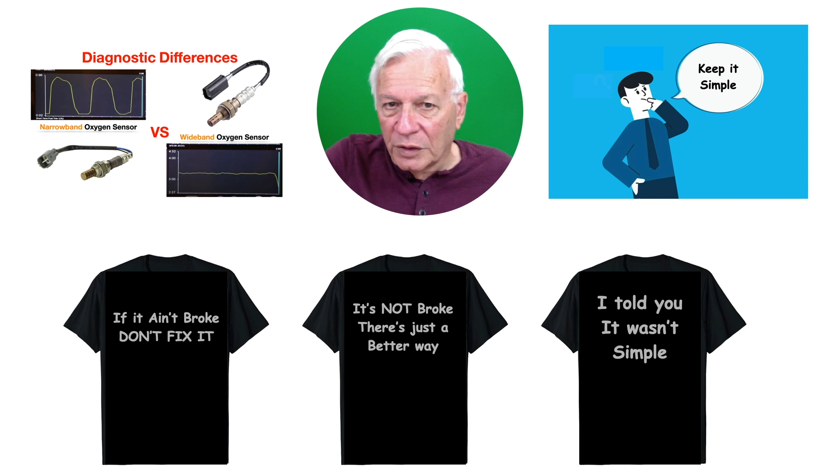In my recent video, I tried to simplify the diagnostic differences between a narrowband and a wideband oxygen sensor and why we have them. But as many of you know, it is not that simple, and many of you have asked questions and commented. Also, some manufacturers monitor and report the data differently. For example, some report amps instead of volts, and other differences, but they all focus on different things. It is not simple at all.

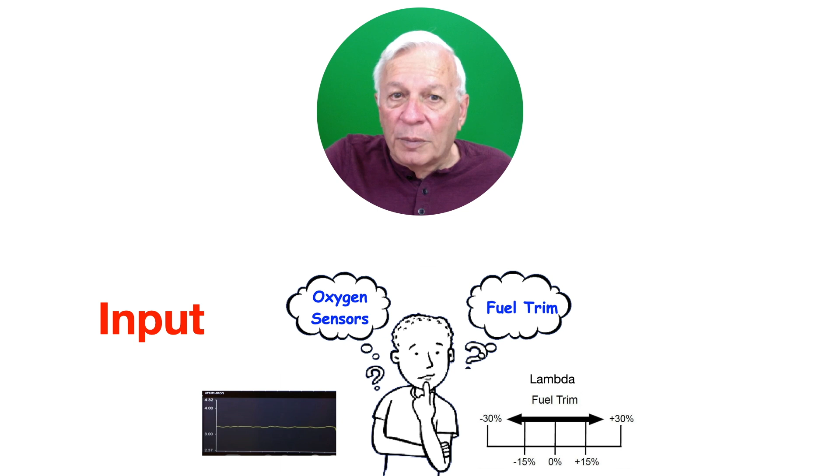To understand just how confusing it is and how technical they are, watch this YouTube video. Frank explains it very well, and it is very technical. Now, we know that oxygen sensors are the input and the fuel trim is the output. We need to understand both.

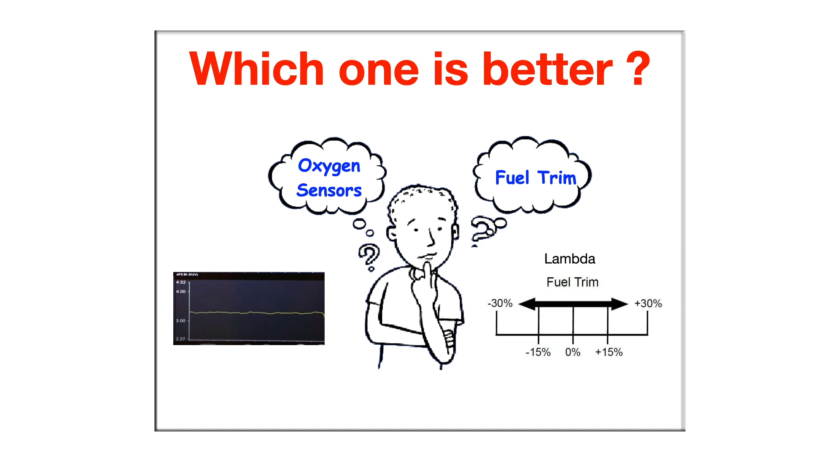That brings me to this question. Which one is better, oxygen sensors or fuel trim? So what do I mean by better? Well, I could have said which one is more important, but they are both important. The better question is this: which should you focus on? My recommendation is fuel trim. Why, you ask? Well, that's a good question, and it deserves an answer.

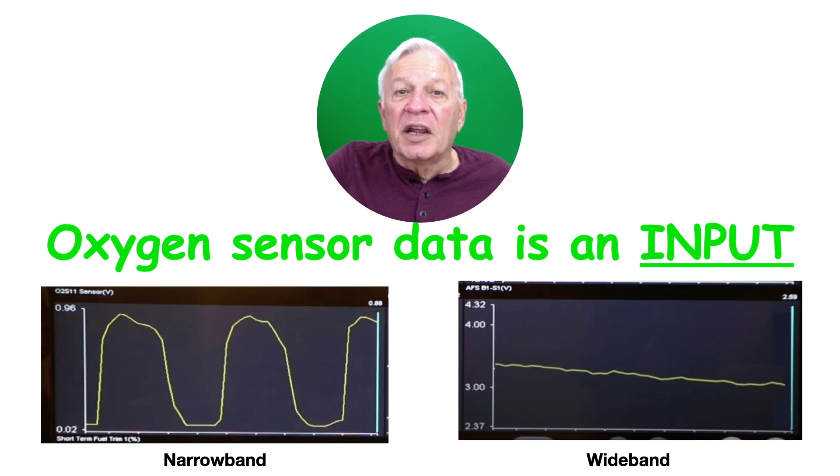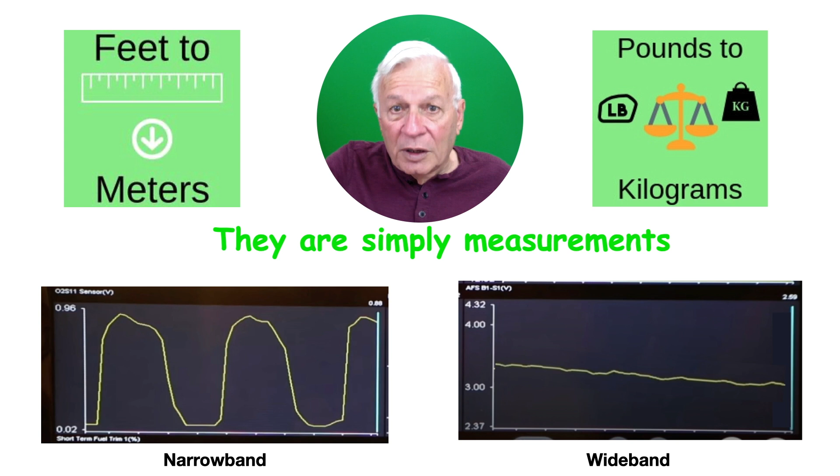Oxygen sensor data is an input. It really doesn't matter if it is a narrowband or wideband sensor, because they are all simply measurements, like feet or meters, pounds or kilograms. They are different, yes, but they are simply measurements. The important thing is what the ECM does with those measurements.

The computer can't add or take away air. It can only add or take away fuel. So, which is it doing? Well, oxygen sensors won't tell you that, but fuel trim will. That means I need to ask this question again.

Which one is better, short term or long term? Well, I'm glad you asked. My recommendation is long term first and then short term. Well, why, you ask? It's a good question.

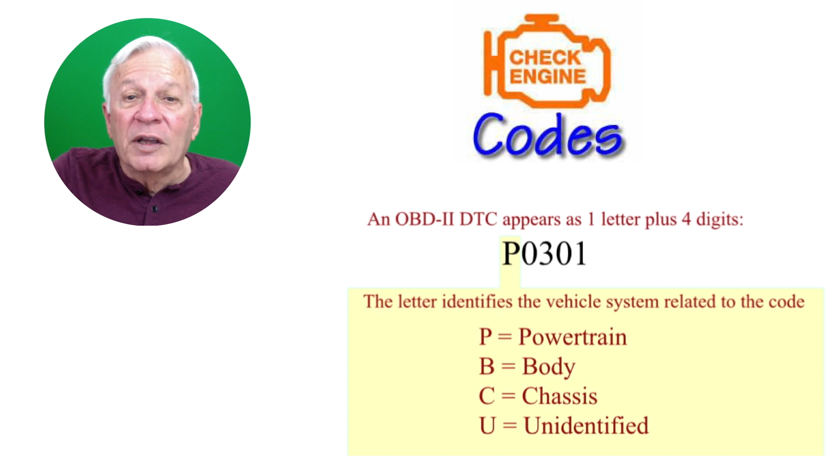I've been around for a while. In fact, I've been here before codes. And if you're like me, you can remember having a clear and distinct misfire, but there were no codes stored in the memory. They called that the good old days, right? Did you know that short term does not set codes?

Short term is constantly adjusting injector on time to balance the air-fuel mixture. It's supposed to do that. These changes are made a few times every second, but they are not stored in the ECM's memory. So freeze frame is not going to be any help.

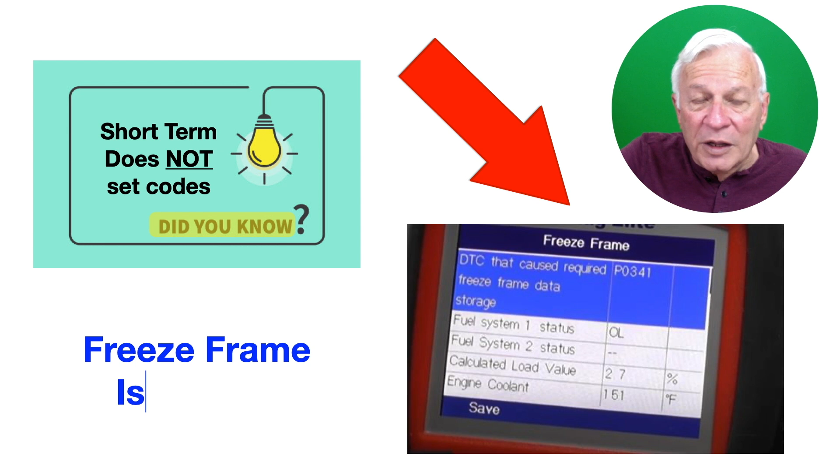Normal is not a problem. Normal does not set trouble codes. Remember, driving conditions are always changing, and the computer has to compensate for all of these changes. Normal is good. That's what is supposed to happen. No codes will be set because it's normal. Not normal is bad. Something's wrong. Codes will indicate a problem.

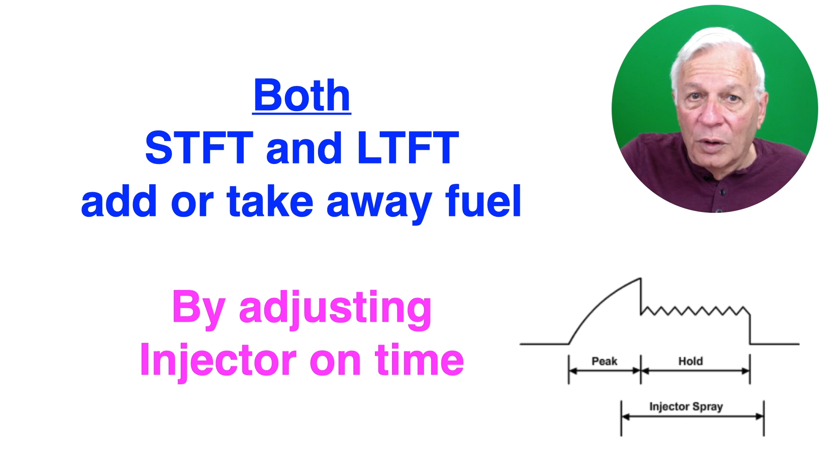Both short-term and long-term add or take away fuel by adjusting the injector on time. But long-term does not change the injector on time directly. It changes the trim strategy. Trim strategy - what in the world is that? Well, it is a plan of action designed to achieve a goal, and that goal is to balance the air-fuel mixture, and balance is stoichiometric 14.7 to 1.

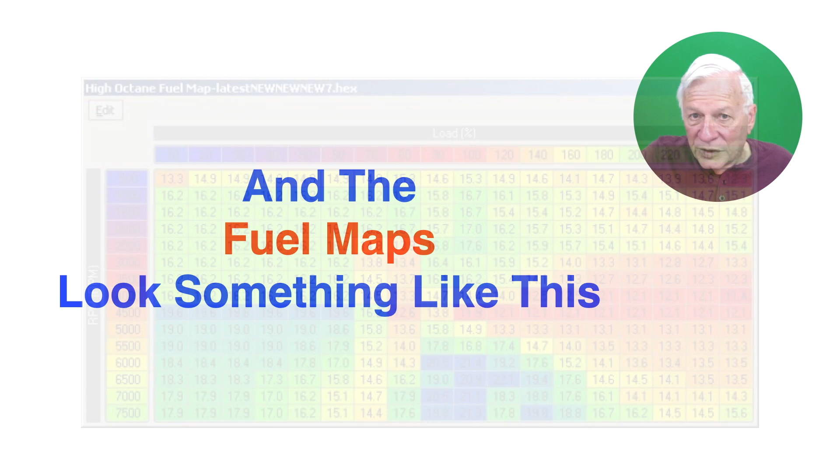This is achieved through what we call fuel mapping. The engineers have considered all of the possibilities and created fuel maps, sometimes referred to as tables. Now, fortunately for us, they have done all the math ahead of time. And the fuel maps look something like this. Notice how 14.7 to 1 appears right in the very middle and at various other points on the map.

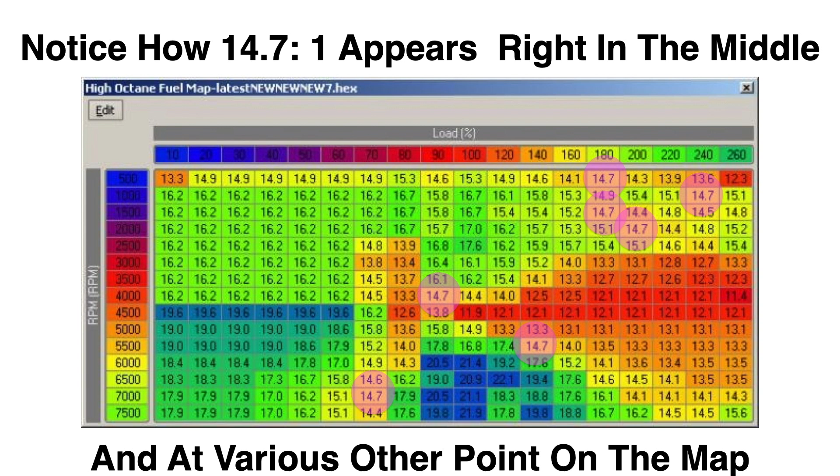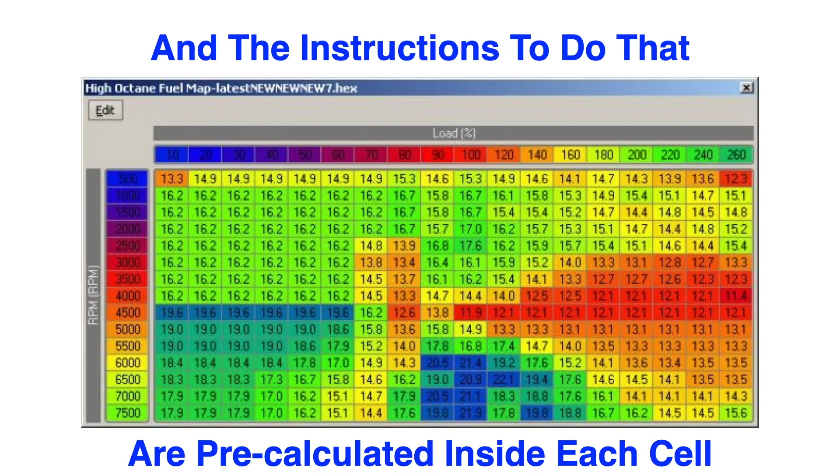Remember, long-term fuel trim does not directly change the fuel injector pulse width. Short-term does. Long-term changes the strategy to achieve stoichiometric 14.7 to 1. And the instructions to do that are pre-calculated inside each cell. Notice how many cells there are based on load and RPM changes.

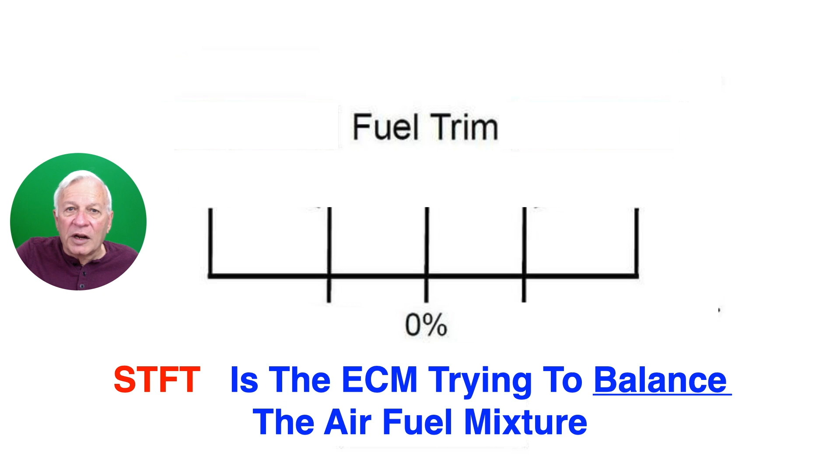Now remember, short-term fuel trim recalculates with every breath of the engine, and it can do that all day long. In fact, it's supposed to. But it is limited to how much of an adjustment it can make, and that limit is 10%. Short-term fuel trim is the ECM trying to balance air-fuel mixture. We call it perfect balance, stoichiometric 14.7 to 1.

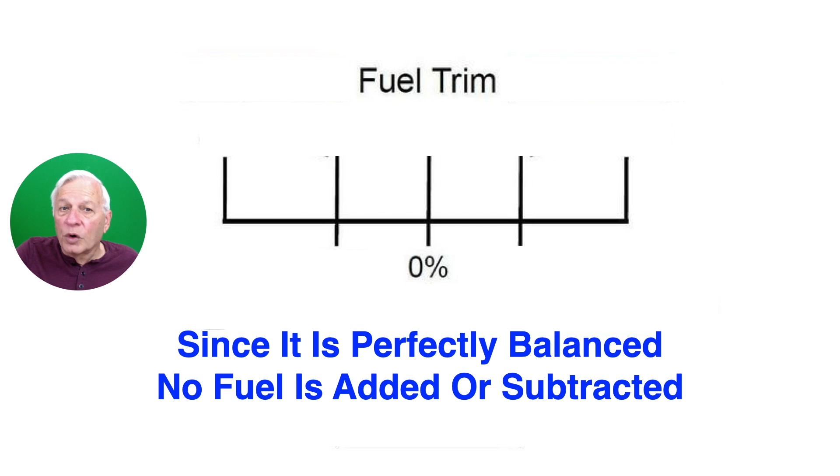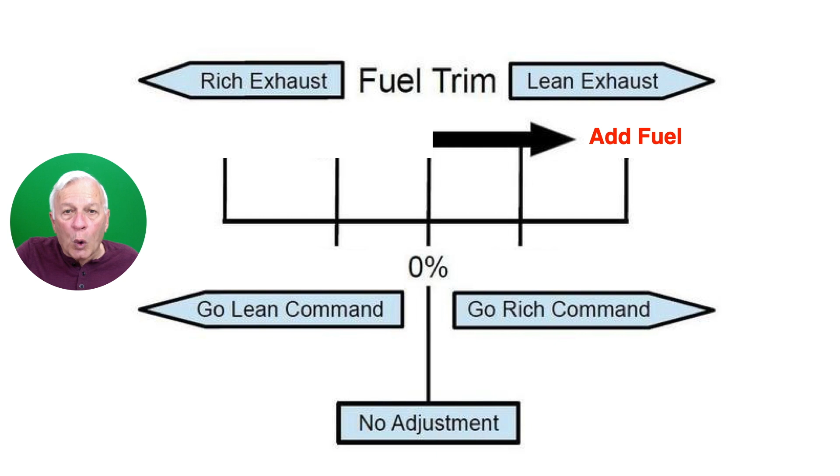Since it is perfectly balanced, no fuel is added or subtracted, and the percentage is 0. No adjustment is needed. Now, if we have a lean exhaust, the ECM issues a go rich command, and it adds fuel. If we have a rich exhaust, the ECM issues a go lean command, and it starts subtracting fuel.

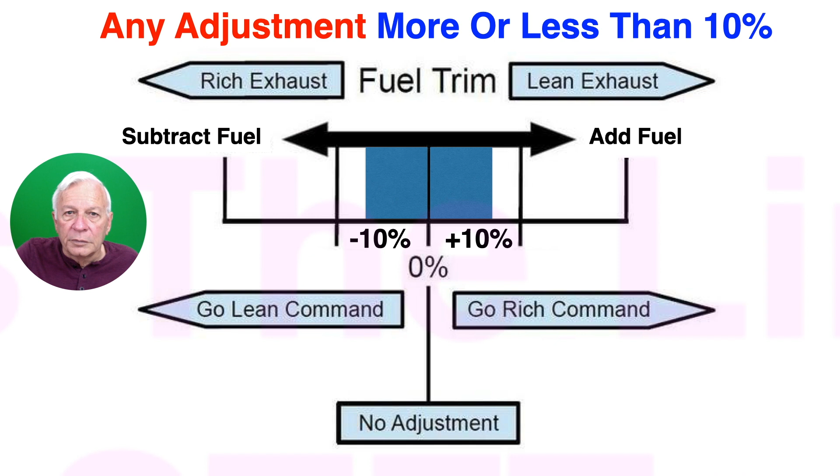Remember, I said it can do that all day long. In fact, it's supposed to, well within limits. And those limits are 10%. So we have a negative or positive 10% limit in this graph. Now, here we have colored in the 10% limit.

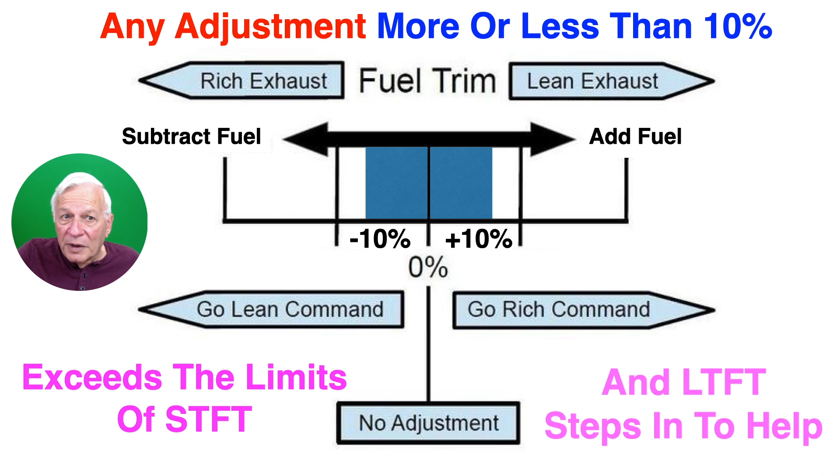And any adjustment more or less than 10% exceeds the limits of the short-term fuel trim, and the long-term was going to step in to help. At this point, the long-term fuel trim changes the strategy, and this strategy changes as needed to gain control and balance the air-fuel mixture. And the short-term fuel trim resets at 0, and it will continue to make adjustments until it reaches its limit of 10% again.

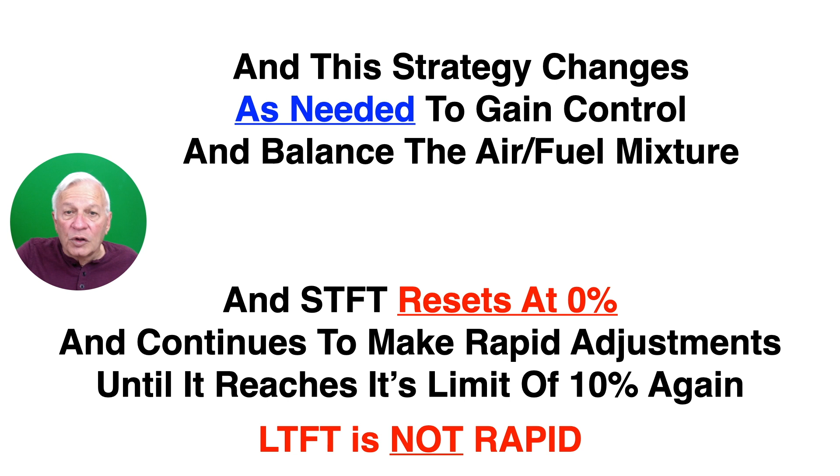Now it's important to note here that long-term fuel trim is not rapid. It usually takes a few seconds to be updated. Remember, it is changing the strategy based on the short-term reaching its limit or its ability to control the balance. Now this all continues until the combined adjustment of both short-term and long-term are above 10%. At this point, the air-fuel mixture is no longer balanced.

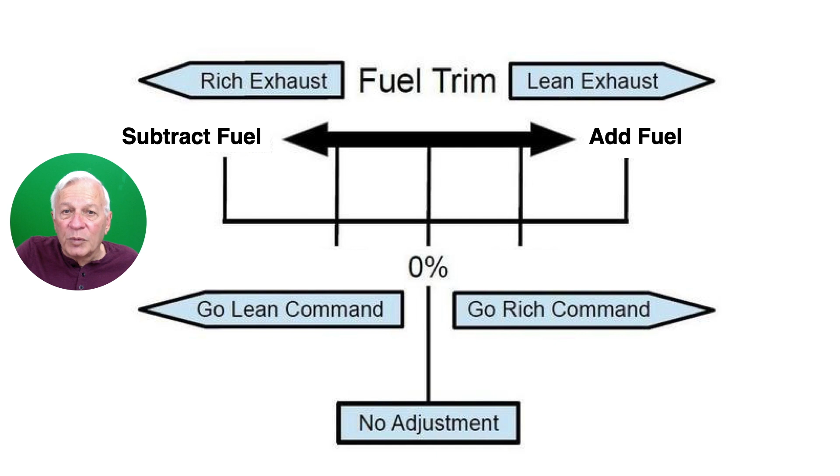Let's watch how this works when we slow it down. So as the engine runs and develops a lean condition, the ECM will add 4% to try and enrich the fuel.

Now it's going to recalculate. Since we just added fuel, it's going to be rich, so the ECM is going to subtract fuel. The ECM is going to recalculate. Since we just subtracted fuel, it is going to have to add fuel again in order to achieve balance.

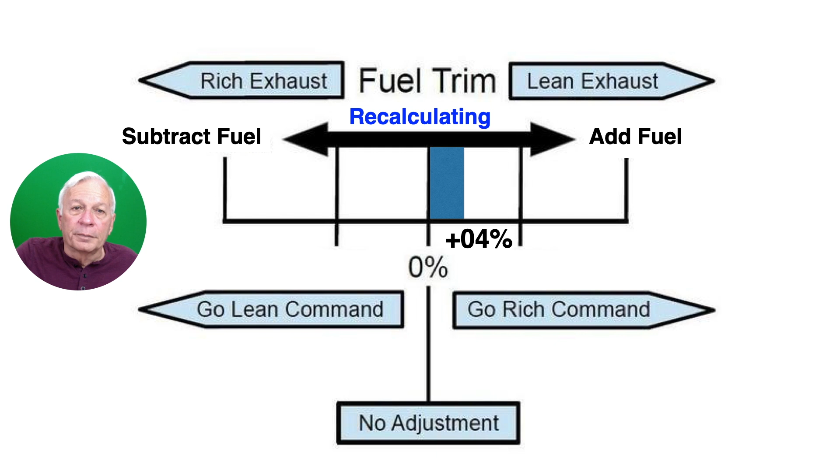Now it recalculates, and it might subtract 7%. Now it recalculates, and we may have to add 8%. Then it recalculates again, and we may need to subtract 9%. Then it recalculates again, and it may add 10%. It will recalculate, and then it may subtract 13%.

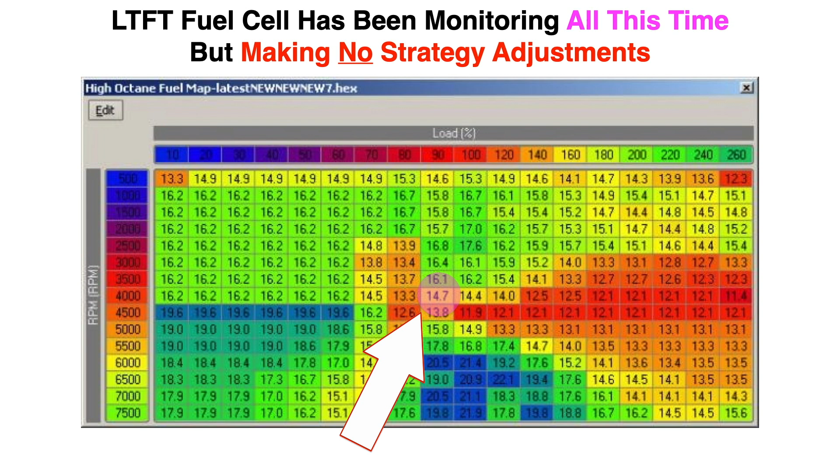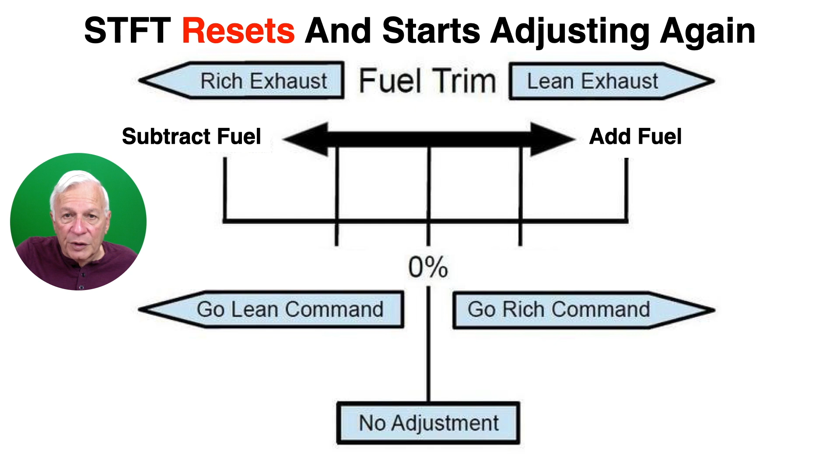Now we've gone over the 10% limit. Now the long-term fuel trim has been monitoring all this all the time, but it's not making any strategy changes because it has achieved the 14.7 to 1 stoichiometric balance. Now the short-term resets and starts adjusting again, so we're back to 0%. It's going to continue to recalculate, and unless the problem is gone, it's going to try and add fuel.

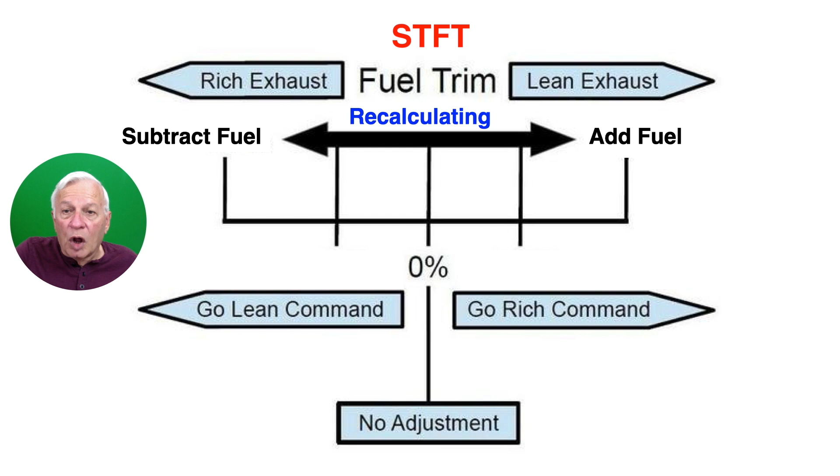Now in these recalculations, I am just making some assumptions here. These percentages would always change due to how severe a problem you really had. Now it would set a code and change the strategy. Since it could not maintain balance, it would shift to a different strategy and attempt to achieve the balance of 14.7 to 1 again.

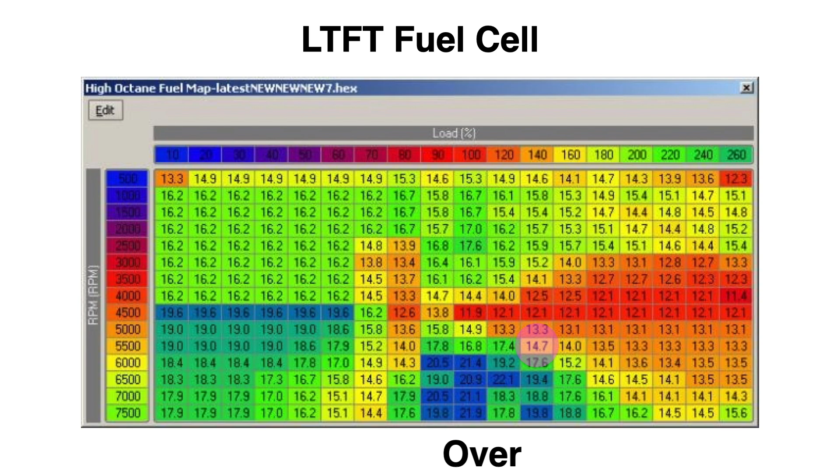It's recalculating over and over again as long as the engine is running. The ECMs do a very good job of managing the air-fuel mixture, and all this recalculating and fuel trim strategy changes go on without even us being aware of it. Usually. But sometimes the PCM can't keep it balanced, and that's when the check engine light comes on, making us aware of the fact that it can't keep it balanced.

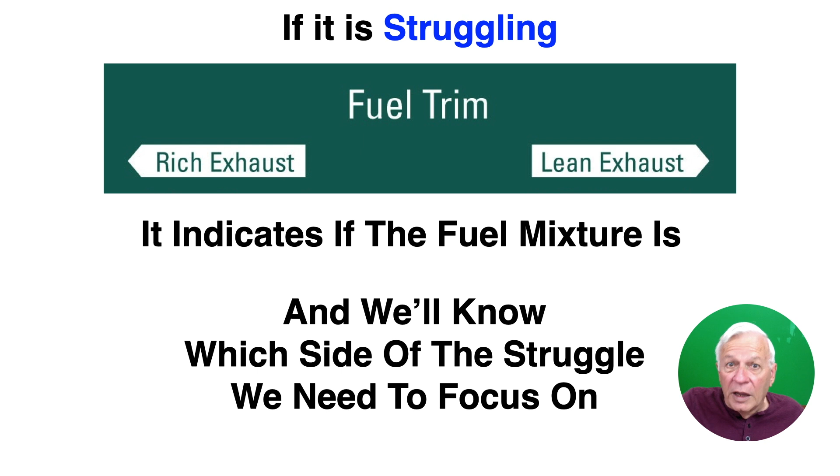So why should long-term fuel trim be the first data PID that you look at? Well, instead of wondering what to spend your time on or what to check first, if you look at the long-term fuel trim first, you'll know if the PCM is successfully doing its job or struggling to keep the air-fuel mixture balanced. If it is struggling, it will indicate that it is either rich or lean, and we know which side of the struggle we need to focus on.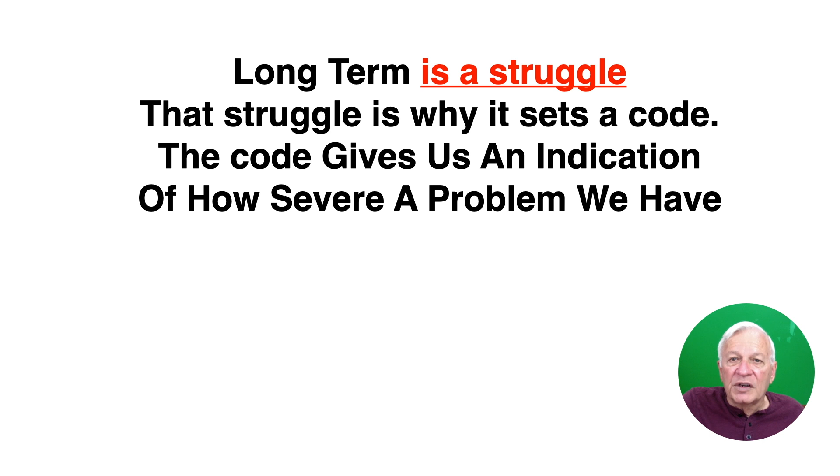Why is it rich or why is it lean? Short term is not a struggle. This is why it doesn't set a code. It is an adjustment. Long term is a struggle. That struggle is why it sets a code. The code gives us an indication of how severe a problem we have. So be sure to focus on and work to fix what's causing the ECM to struggle with the long-term fuel trim. Focus on why.